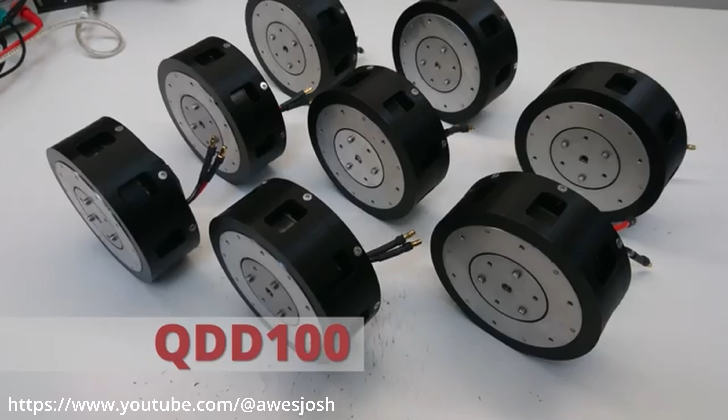My own quasi-direct drive actuator using a brushless motor, an FOC controller, 12 Eagle Power LA8308 motors, refining the QDD100 quasi-direct drive actuator. This is a brushless DC motor. It's got a really high torque density, it's sometimes called a pancake motor, and it's really good as a robotic actuator. The really cool thing is this FOC controller. Basically, it allows you to get the most out of your brushless DC motor.

The main problem is that these motors are a couple hundred pounds, and the controllers aren't much less. So trying to stack this for all the actuators that you need for a robot dog, like 12, gets really expensive really quickly. But if you want something really cheap, you can use these. These are just regular DC servos that use PWM to set the servo position. They're really cheap and they're really easy to use, and I think I can make a robot dog out of them.

With the robot, we're controlling the feet. There are 4 feet, and each of these need to move in the X, the Y, and the Z directions. So 3 different axes, so we need 3 motors. So we have these servo motors that I just bought from Amazon. We can use one for the X, the Y, and the Z.

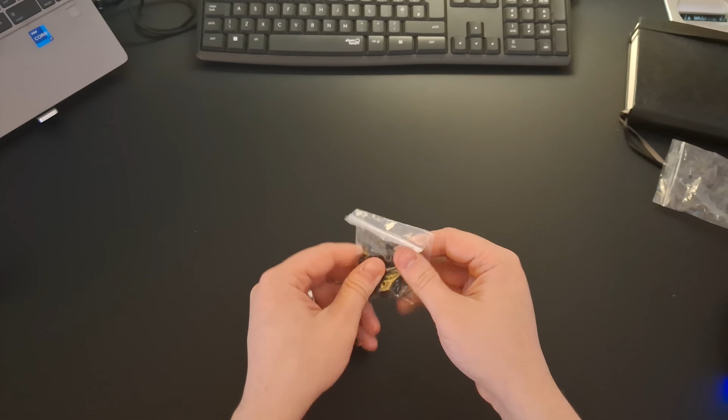So this is the servo motor. There are 4 mounting holes, there's the output shaft that we're going to fit a horn onto, and then we have the cables. So 3 cables, the power, the ground, and the signal.

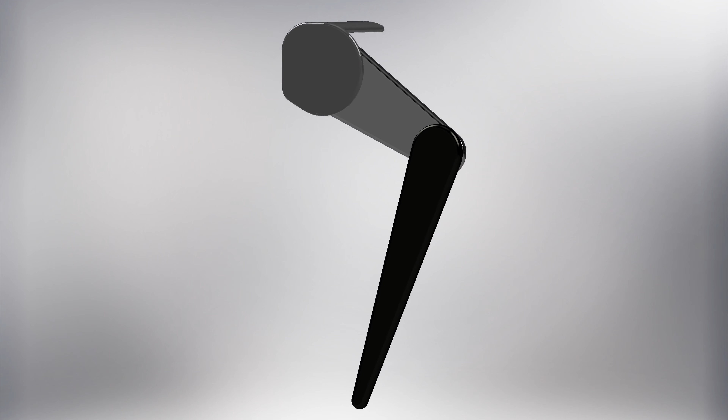So we have these 3 servos now, but how do we actually use them in some kind of leg to make this foot move in all the directions and paths that we want? That's where we need to design some kind of linkage. So I've started here with a fairly standard leg shape with a hip, a thigh, and a calf, and I put a servo controlling each one of them. Now by moving them all in the right way, the foot can move in all 3 axes.

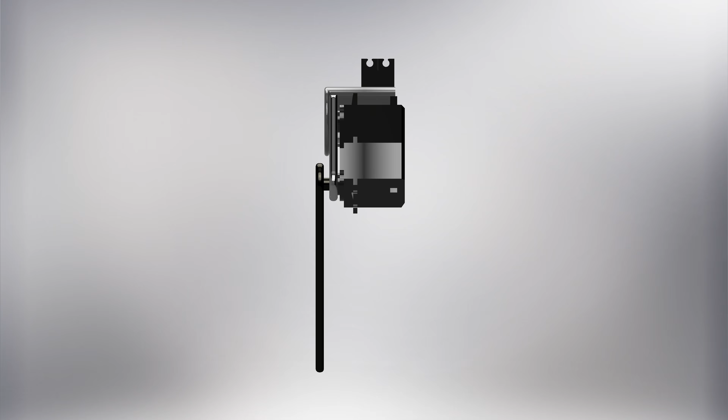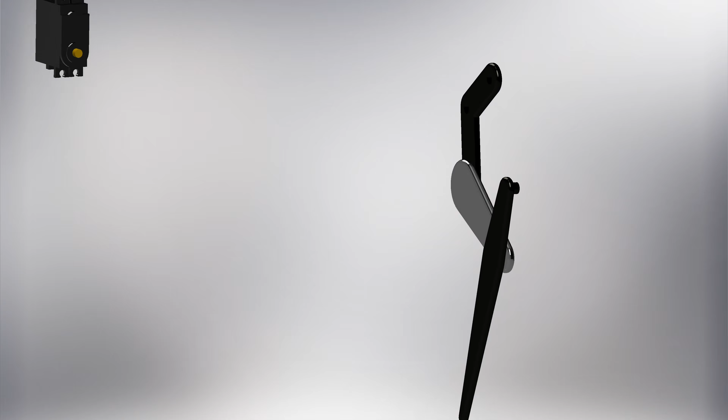The main downside with this configuration though is that the calf servo is all the way out here, so it just acts as a torque arm that will burn out the thigh servo. So we can rearrange things a little bit and use a linkage to move the calf servo up to the top with the thigh servo, while having all the same mobility as before. But now this servo becomes a torque arm for the hip servo, so we can change the linkage again to move the calf servo right next to the thigh servo. A bit complicated, but I think it looks cool.

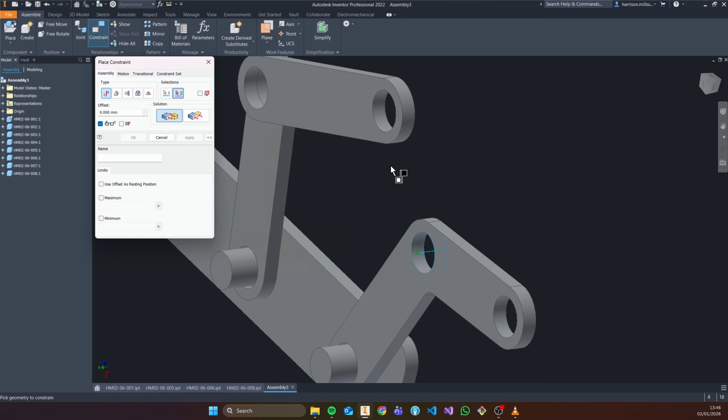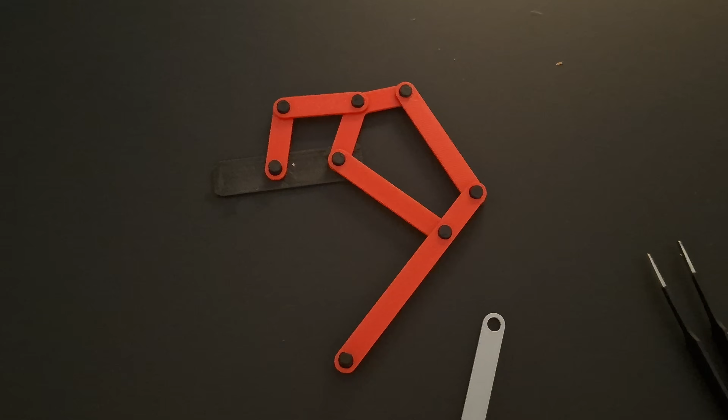So that linkage is all well and good in CAD, but I think I need something physical to actually see how this mechanism works. So let's make something. So I've just made this leg linkage model to see how all the members react when the foot moves. I'm pretty happy with it. There aren't obvious places where it buckles or breaks.

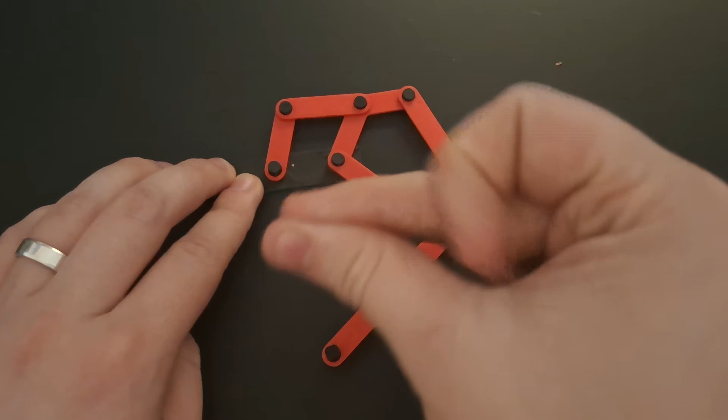I can't quite visualize how the actual servos will need to move, so let me just... So I've just changed the color of these 2 members, which will have the servos attached. And I'm quite happy with the range of motion going on there. You know, they both move at similar speeds and they don't really jump around a lot. So yeah, I think we'll go with this.

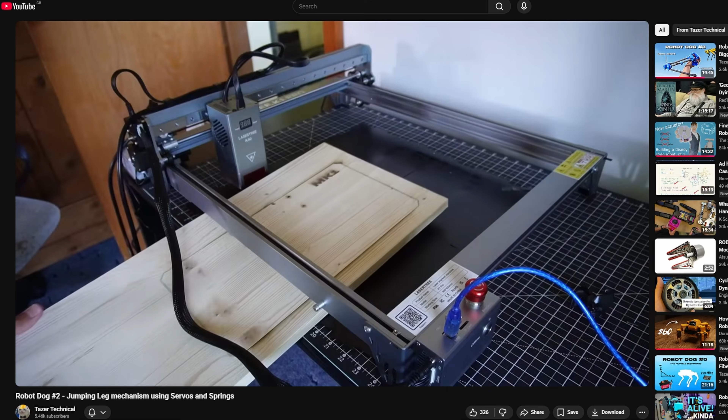So yeah, this is Tazer. He's an engineer that I've been watching for a while on YouTube. He makes some really great videos. He's working on a robot dog project of his own right now.

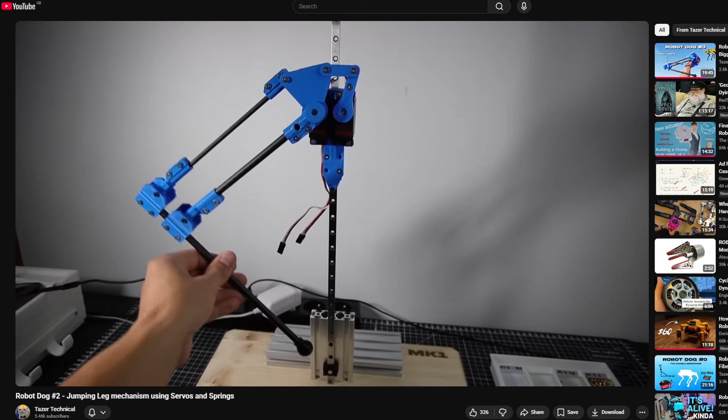So I was on YouTube last night and I saw this. And I thought, yeah, that looks a whole lot like my linkage. So to be fair to him, I don't want to plagiarize his work or anything, so I think I'm going to go back to the drawing board and design some alternative leg linkage.

Okay, so back to this linkage. I like how these 2 servos are adjacent to each other, so we can take it apart and do some rearranging. I got this idea from a video I saw of an Indian shopping account on TikTok of a drawing robot.

But this is just a 4-bar linkage, and we have the same leg parameters. We have the 2 servos being next to each other at the top and a single foot position. And we can move this foot in 2D space using just the angle of these 2 servos.

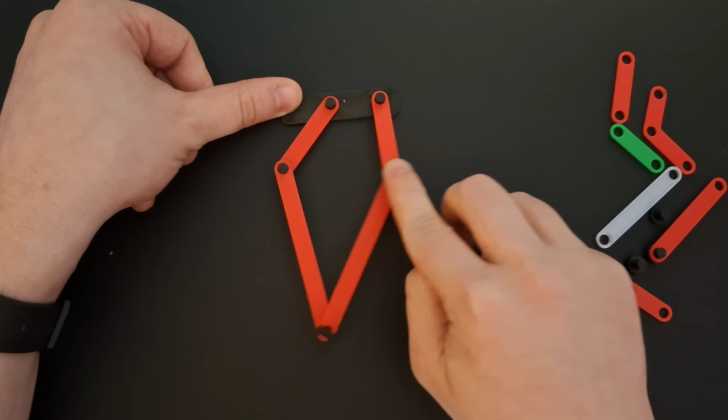The downside is that we can get some buckling like this happening, so we're going to have to limit the position that these thighs can be in. But this is why we do these prototypes in the first place. Cool, let's get this working with some servos.

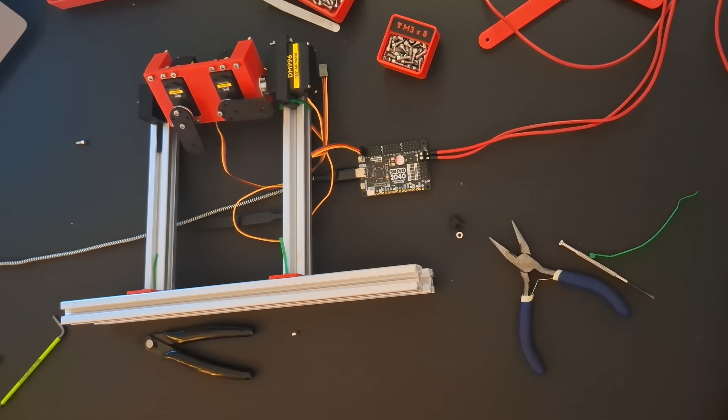So now this is all together, we can properly test this mechanism with our servo motors. I'm using these 3 potentiometers to control the angle of each servo, and the linkage will just carry that movement down to the foot. So right now I can control the hip servo, the front servo, and I can move the rear servo, and you can see how the foot moves.

But this way of controlling the foot is rubbish. You know, if I wanted to move the foot directly up and down, for instance, I would have to move these 2 servos in steps sequentially, which would take ages. So imagine trying to move the foot in a more complex path, for example taking a step.

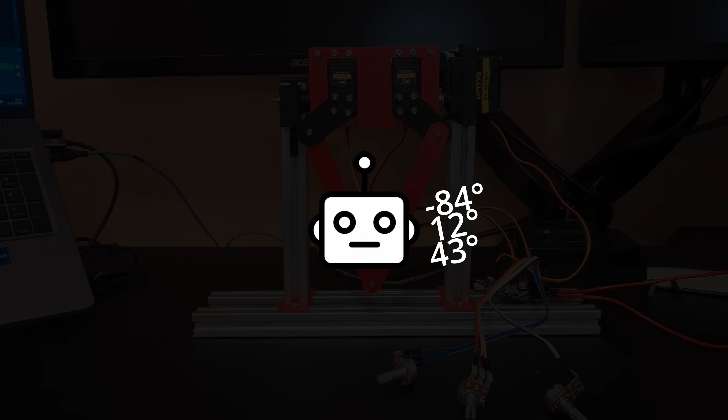It just wouldn't work. This method of controlling the foot position is called forward kinematics, where we control the servo angles and the foot just moves wherever the linkage carries it. What we want to be able to do is to define the foot position and for the servo angles to be worked out automatically. And this is called

inverse kinematics. It can be solved a bunch of different ways, but since we have 3 motors and 3 degrees of freedom, the foot X, the Y and the Z position, we can solve it with just a bit of trig. Let's look at the leg side on.

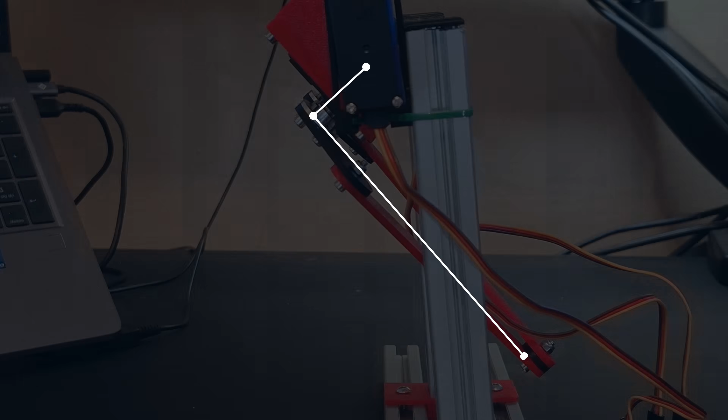We have 3 main points, the hip, the knee and the foot. These points are defined relative to this blue dot, which is just the centre of the robot. We define the foot Y and Z positions, and we're trying to solve for the hip angle and this length B, which is basically the extension of the leg.

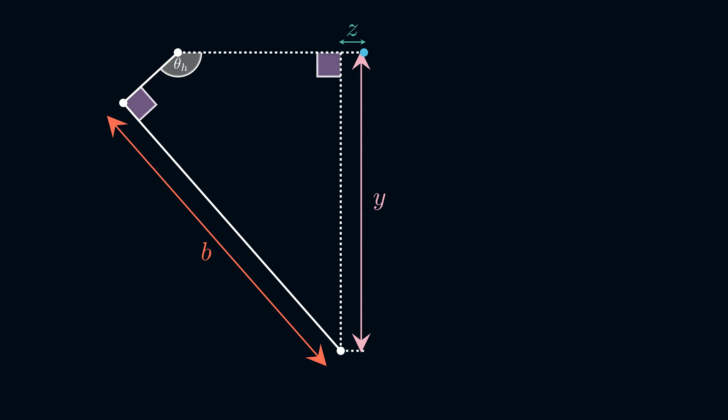We can find B by splitting the shape into 2 triangles and doing a bit of Pythagoras. Then we can find the hip angle by splitting it into 2 and doing a bit of trigonometry. Nice.

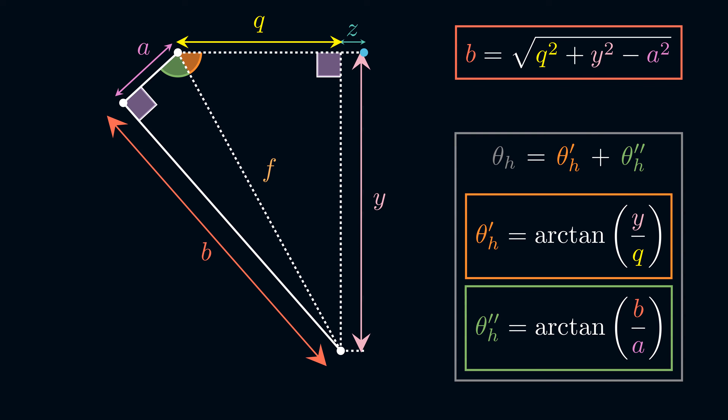Looking at the front now, we define the foot X position, and we can bring in this extension B from the side view. There are 2 thighs and 2 calves, and since their lengths are constant, we can draw these circles. And where these circles intersect are where the joint can be.

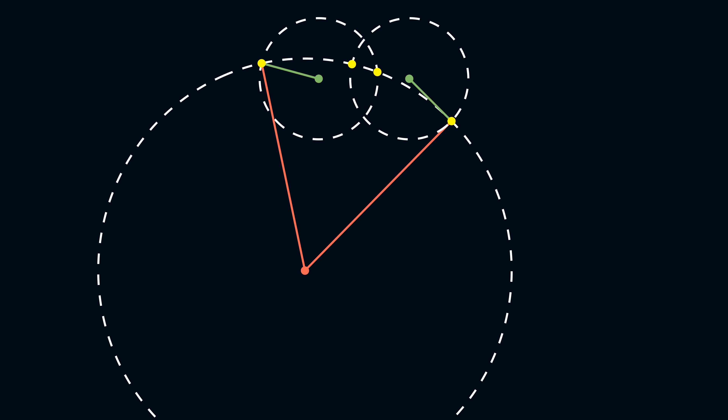Now these points move when the foot moves, so we just pick the points we want, and then since we know the positions of these points and these points, we can calculate these angles for the 2 servos. And combining all this together gives us a single function that takes in the foot coordinates and outputs the servo angles. Awesome.

Okay, so I've programmed that inverse kinematics routine in, so what I'm going to do now is use these 3 potentiometers from before to set the foot X, Y and Z coordinates. So we can set the X position, we can do the same with the Y, and we can also, which I think is the coolest bit, move the foot Z position, which requires all 3 servos moving in tandem to set the foot position.

So we've made a bunch of progress here. We've selected the motors, we've designed a leg and we've tested it, we've solved and implemented the inverse kinematics, so really, we're just about ready to start designing the robot.

Okay, fine, I just really want to start designing this robot. It's cat time, baby.

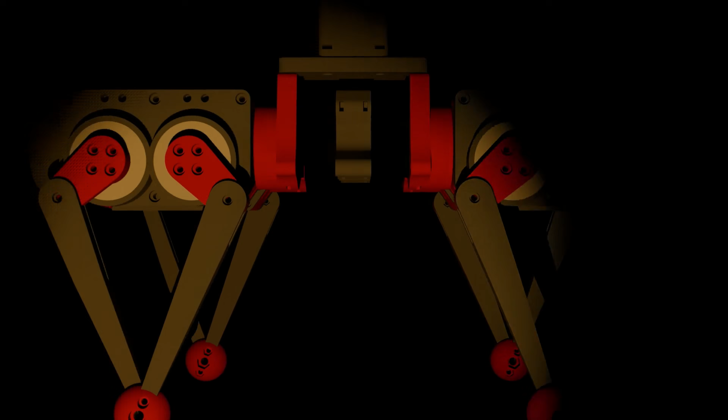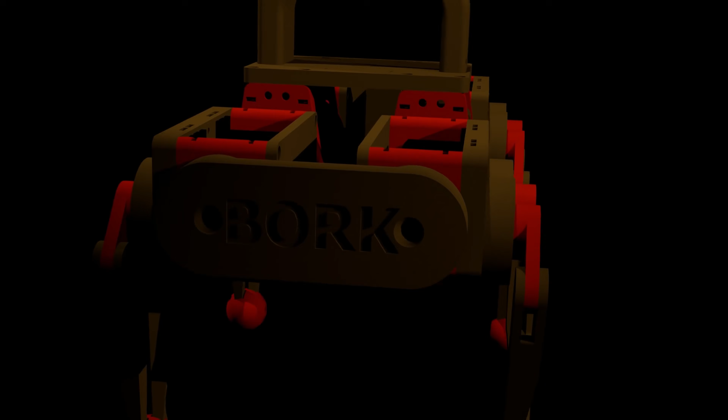Right, now that Coda is all designed, it's time to put it together. Some insane mechanical design means that she can be assembled in just 15 seconds. Don't believe me? Ladies and gentlemen, I'm pleased to introduce you to Coda.

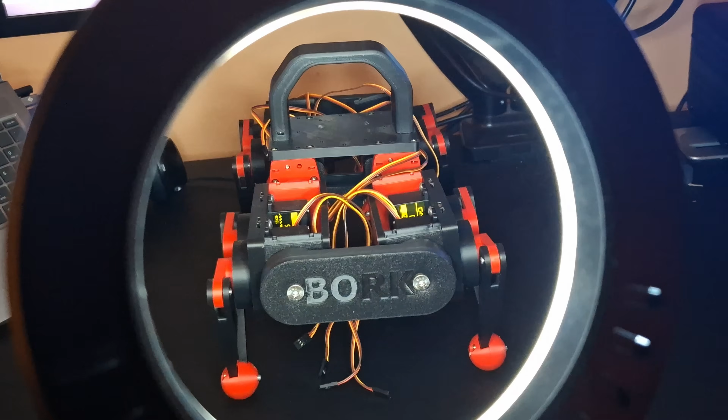She weighs 2.8 kilograms, which is probably due to these oversized bearings I'm using. So yeah, this is Coda. I'm really happy with how she's come out. She's a little heavier than I anticipated, but I've done some rough calcs and we're well within the ratings for the motors. This carry handle is really useful.

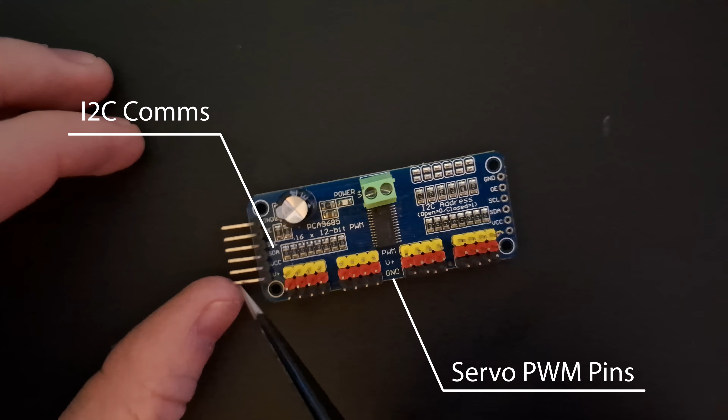So the next challenge is how to actually drive all of these servos at the same time. I initially bought this, which is a servo breakout. It's really good, but it's only rated for 6 volts, so not really enough for what we need. And these terminals to carry the power are really small. So with a bit of research, I found this. This is a Servo 2040 board, and it's rated for 11 volts with 10 amps of continuous current draw, which is great for what we need.

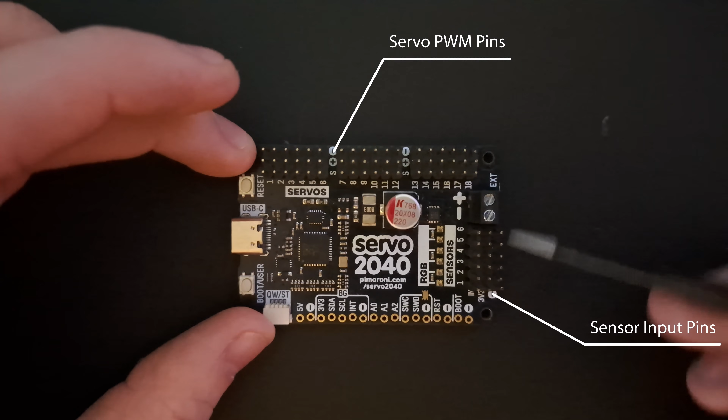The really cool thing about it though, is it has this RP2040 chip on it, which means that we can run MicroPython on it. So it's basically a microcontroller and a servo driver at the same time. Right, let's wire this all together and see what we can do.

So yeah, the main downside of this board are these really small power terminals, and since we can draw up to 10 amps, which is a lot of current, with really small wires that equals a lot of heat. So I'm going to try and bulk up these wires as much as I can and try and be cautious about how much current we're drawing.

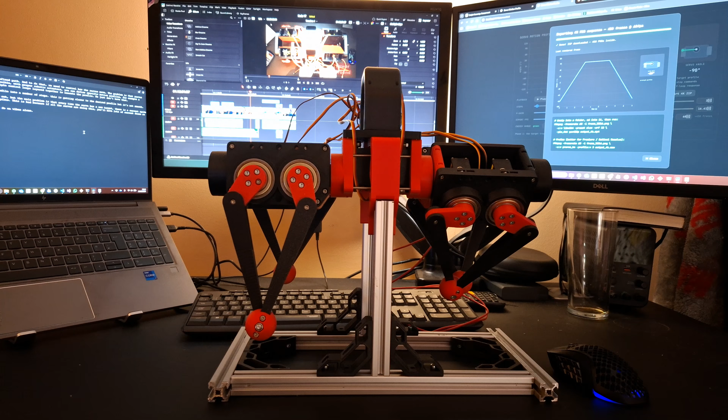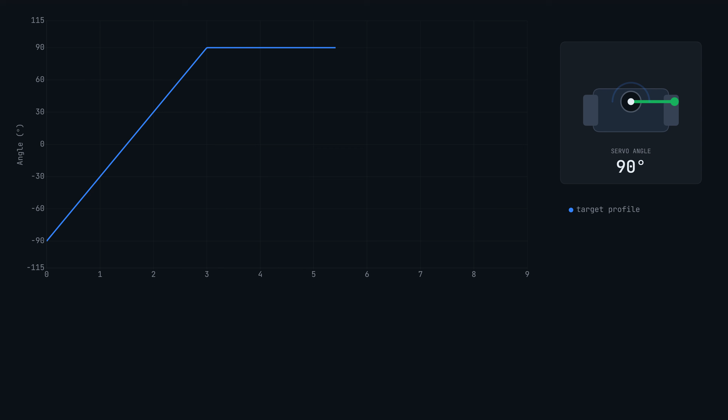The next step is to get the feet moving along some defined path, and to do that we need to control how the servos move. Now the problem is that servos just move to their target position as fast as they can, but with proper robotic actuators, you can define some specific motion profiles, like a trapezoidal profile. The actuator would then use multiple control loops stacked on top of one another to execute that profile, but with servos we just don't have that ability.

The best thing we can do is to break the profile into steps, so the servo moves from one step to another, simulating the path. This is okay, but it's certainly not smooth. We can increase the number of steps to smooth out the profile, but one issue is that once the servo gets a new target, there's a big torque spike and a current spike.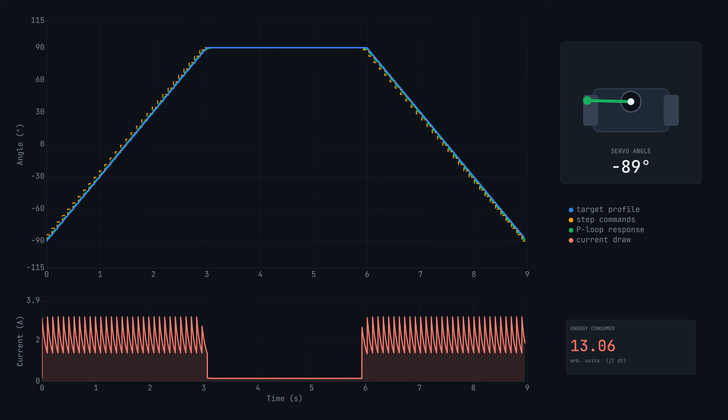This is bad because if all the servos are doing this, and there are lots of spikes, you'll have really high current draw, the motors will get hot and wear quickly, you're going to drain your battery, not really a good idea. Servos also have a maximum control frequency, so there's a hard limit to how small these steps can be anyway. So we've got to balance the smoothness with this current issue, which I'm going to do on vibes alone.

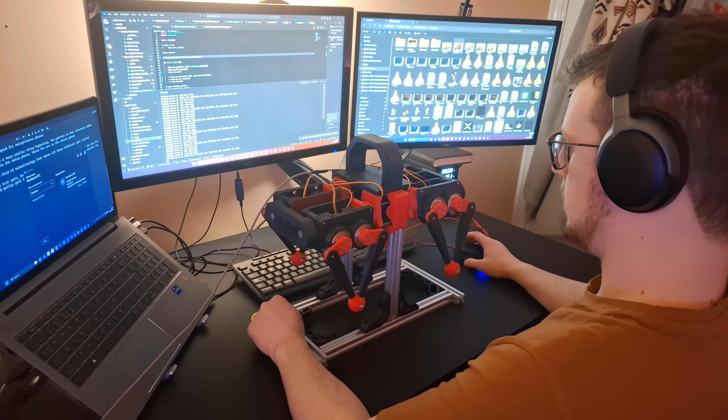Okay, so now I've got this working so that the legs move. Coda, stop. The legs are moving back and forth. But this poses the question, how do I make it walk? The mechanics of walking is mainly made out of two things. You have the foot trajectory, which is just the path that the foot follows when it takes a step. And then you have the gait pattern, which is just the order of which foot moves when.

Starting with step trajectory, to do some research, I needed to find a mammal with about the same level of intelligence as a dog. Here's one I made earlier. You can see that there are two clear phases to the step. You have the swing phase, where the actual step is taken, and the stance phase, where the foot is in contact with the ground, pushing against it.

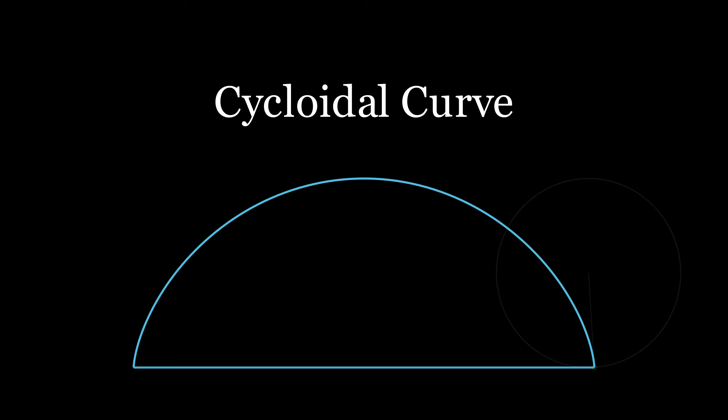Now there are a bunch of different step shapes, but I've chosen to go with the cycloidal step trajectory with the corners rounded for a nice natural step shape. Moving on to gait now, if we look at our test subject, you can see that as one foot is in the air, the other foot is on the ground, and then they alternate. And this is all well and good for 2 legs, but how does it work for 4?

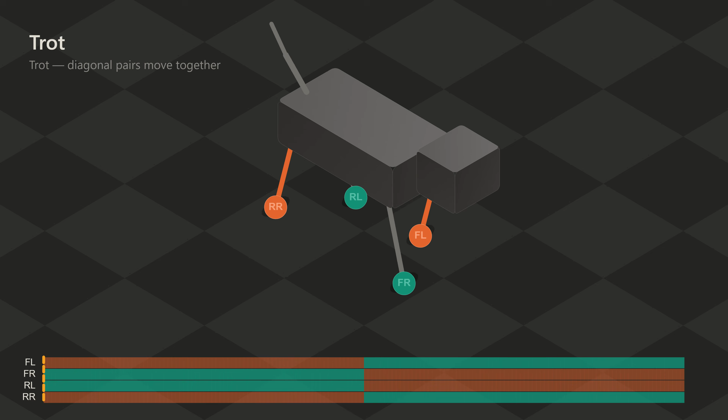Here you can see that there's actually a very similar thing going on. The pattern is that alternate limbs match, so while two of the limbs are in the swing phase, the other two are in the stance phase. Now this is actually called the trot gait, where diagonally opposite limbs move together, but there are a bunch of different gait options. You have the crawl gait, where only one leg is moving at a time, and then you have the gallop gait for some really dynamic movement.

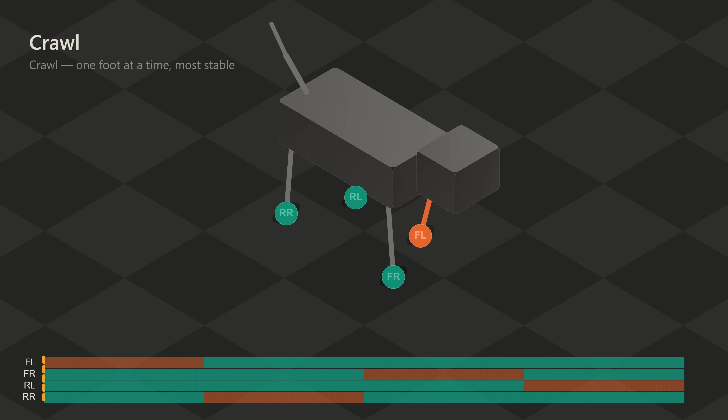We're going to start with the crawl gait, because it's the easiest to implement, and because it should be the most stable of the gait patterns that we've discussed. I programmed the cycloidal step trajectory in, and that's running quite smoothly on the robot. The code works by breaking the path into steps and working out the inverse kinematics for each one. It then just runs through each of those steps one by one to execute the path.

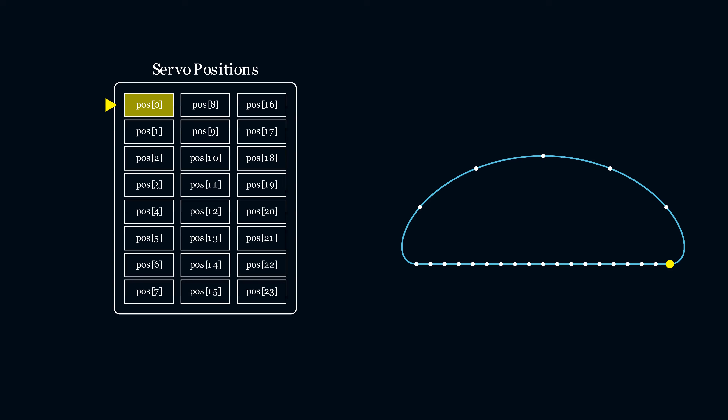You'll notice that there are more positions in the stance phase, which is how we make it slower than the swing phase. Getting this to work on multiple legs is actually really easy. The inverse kinematics is pretty much all the same, so we just apply the path to each leg. The only thing we have to sort out is their timing, otherwise you get this.

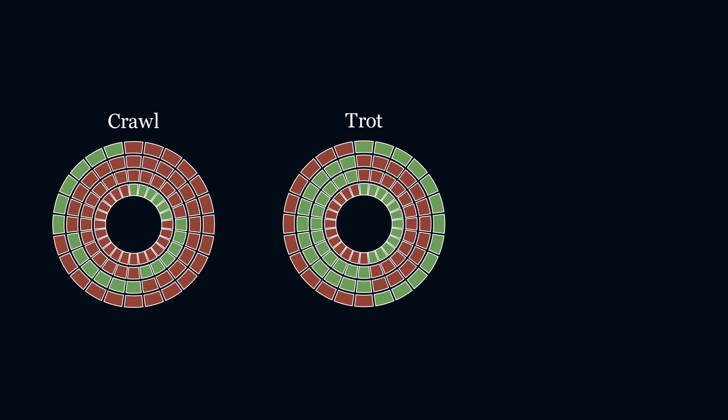The timing all comes from the gait. We set the starting positions of each foot and the duration of the swing and stance phases, and with just those two parameters, we can generate any gait pattern that we want. So after a few code mishaps, here's the crawl gait implemented on the leg. I'm happy that it's doing the right thing, so let's try it out.

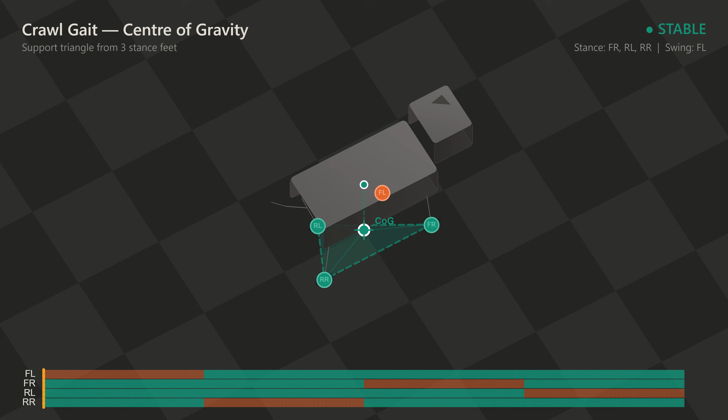Okay, so Coda is walking, but it's very unstable. And to look at the reason why, we need to look at the centre of gravity. Coda is designed so that when one foot is off the ground, the centre of gravity is within the support triangle. But in reality, the dynamics mean that the centre of gravity moves around, leading to this instability.

Really, we would want to be able to move the robot while walking to move the centre of gravity, which would be a good idea for the next version, but I think the easiest fix is just to lean into these dynamics and use the trot gait instead. I think it's time to take Coda for a walk.

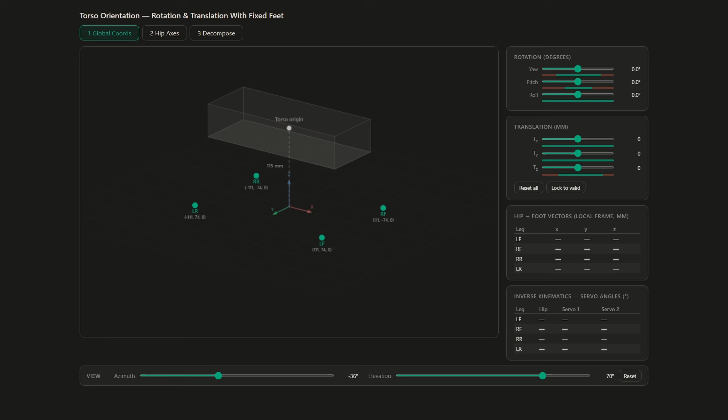So there's one more thing I want to unlock with this robot, and that's orientation control. Currently we can move the legs, but we can't really control where the torso lies. So really, Coda can't dance. To show the maths on this a little, we start by defining four feet stationary to the ground and this torso centre. We stick some axes on the torso and one on each hip, and these all react when we change the torso pose, but the feet stay still.

Then all we do is find the coordinates from the hips to the feet using the hip axes, plug that into the inverse kinematics, and then we have servo angles to achieve the pose we want. Let's see it in action.

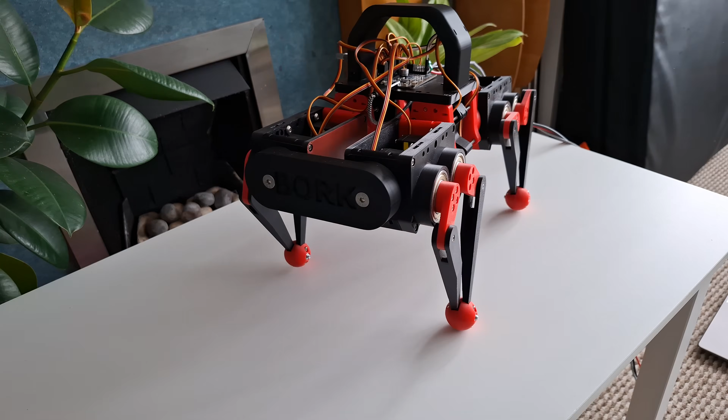Okay, I think I'm going to call it there. I'm really happy with how Coda has come along, and I'm one step closer to having that robot dog I always wanted. And I didn't break the bank doing it. Coda came in just shy of £100 for all the servos, 3D printing materials, fixings, and electronics.

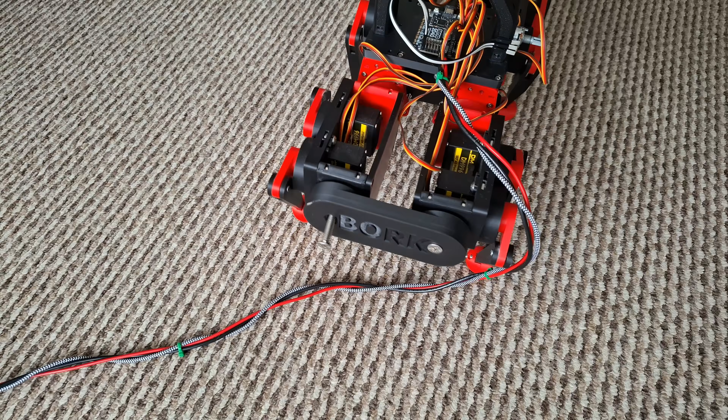Of course, as an engineer, I'm never 100% satisfied with my designs, and there's loads of things I want to fix and upgrade. To mention a few, you've got these fixings which fall out constantly and are a pain to refit. I want to change the foot material so it doesn't slip as much. I want to have some servo zeroing during startup. There's a bunch of code optimizations I want to do. And the big one is getting rid of this lead and making Coda a battery-powered remote control quadruped. Plus a whole list of other upgrades. So stay tuned for the Coda V2 video that will come out sometime in the future.